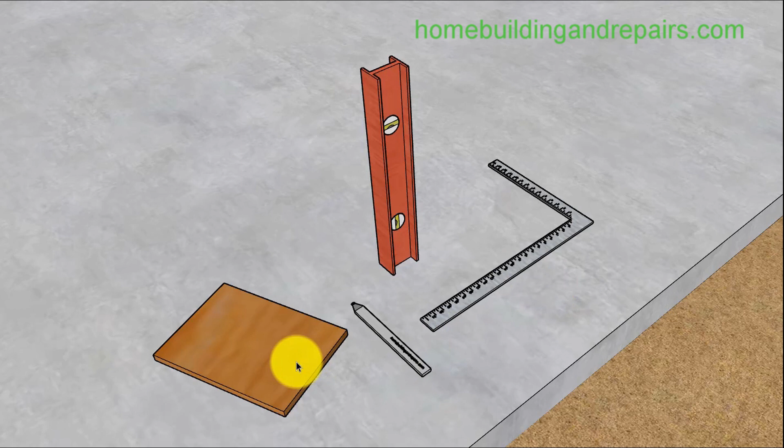In this video, I am going to provide you with a method that can be used to figure the roof pitch or angle of a roof, the slope of a roof, with a level, a framing square, a pencil, and a scrap piece of plywood.

This will work even if you have shingles on the roof, with a long enough board. Even if you had tile shingles, you could position the board in a certain spot to get the angle and do the same thing. So you can give it a shot, and you don't need to climb up on the roof to do this. I'm at the edge of the roof here. Get a ladder, and on a two-story house this would be a little harder to do, even harder on a three-story home.

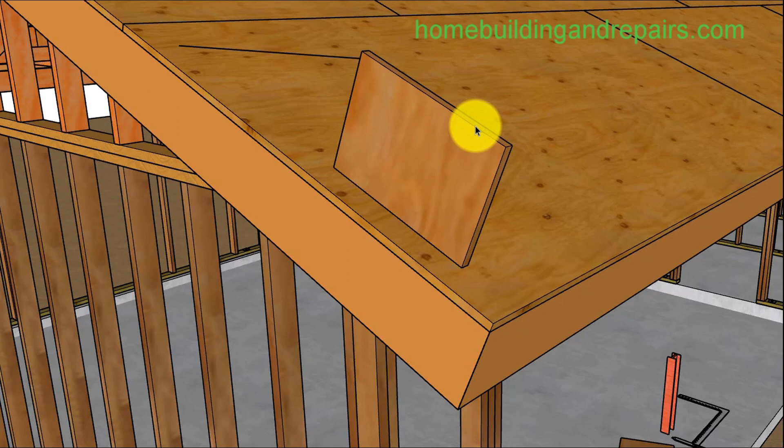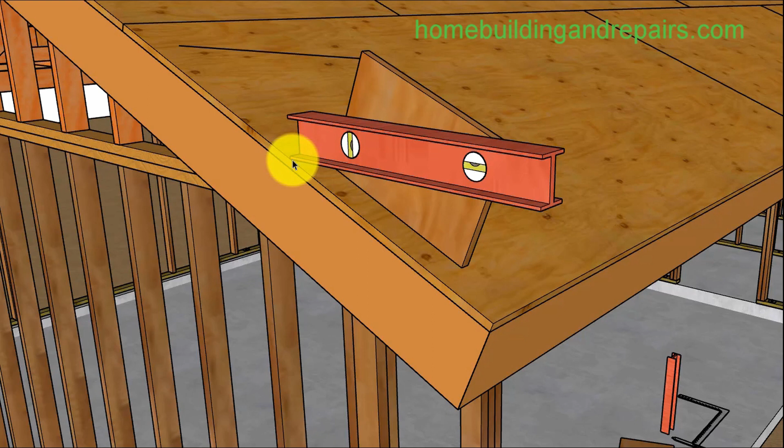So first, put your scrap piece of wood on top of the roof. You're going to need something at least 12 to 15 inches long and about 10 inches tall. Then put the level up on the roof. It will rest on the edge of the roof sheathing or shingles, and then level it. You can see it here.

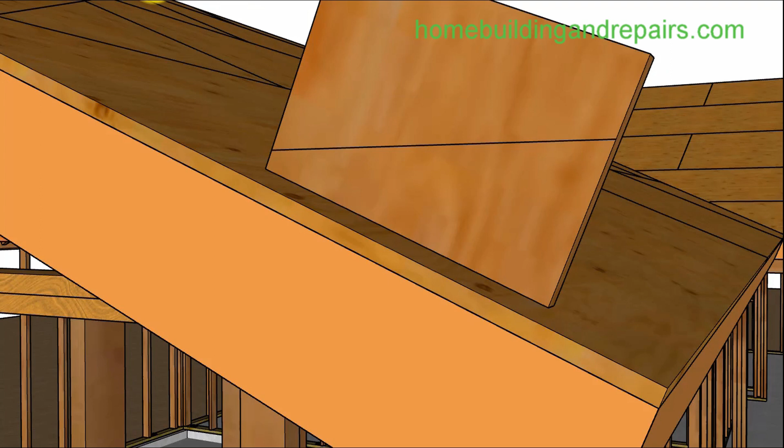The board doesn't need to be positioned exactly over this point. Just get yourself a straight line across the piece of plywood and mark it. If you're looking for a more accurate reading, because a small piece of wood could be on a hump or a warp, something like a bow, or a curved surface, this isn't going to give you a good reading. A longer board might give you a better reading.

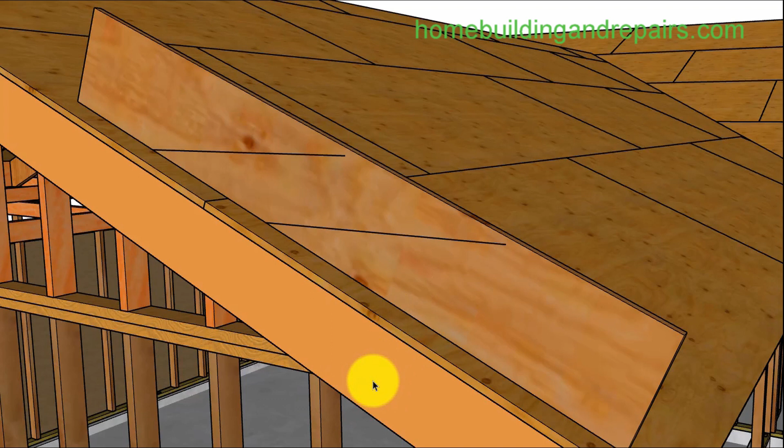You might need to take the longer board and put it in a different area of the house. The same method could be used on the fascia board, but sometimes the fascia board is bowing or warped too, creating the same problem. So this isn't going to give you a perfect roof pitch number all the time, but most of the time it's going to get you close enough to do some repair work if you need to.

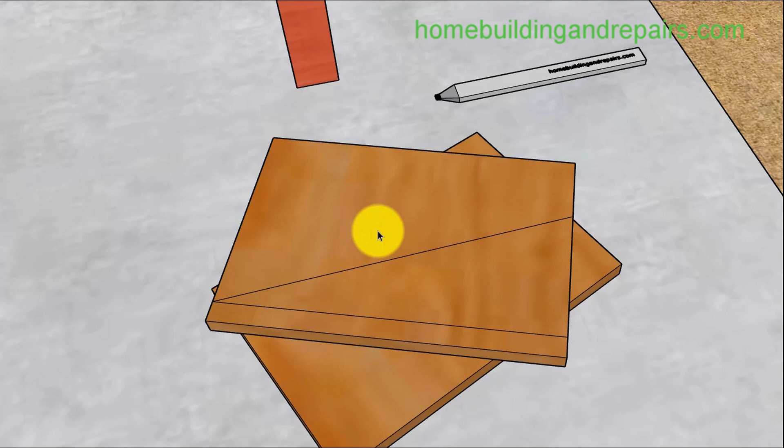Next, take the piece of plywood down and put it on a flat surface. Draw a line parallel to the roof surface. Remember, this was the surface of the roof sheathing, this was the line we made with our level. We want it to come off of this point so we can use it for our framing square.

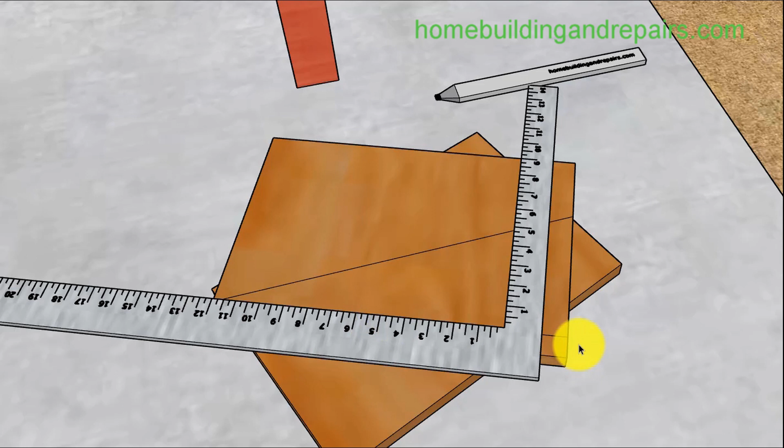The framing square will line up the number 12 on the framing square with that point, and it will be parallel to the line we put on there to create the point that's parallel to the roof sheathing. So here's the 12, here's the 5. This gives us our pitch. We would have a 5 in 12 roof rafter, or 5 in 12 angle, on our roof.

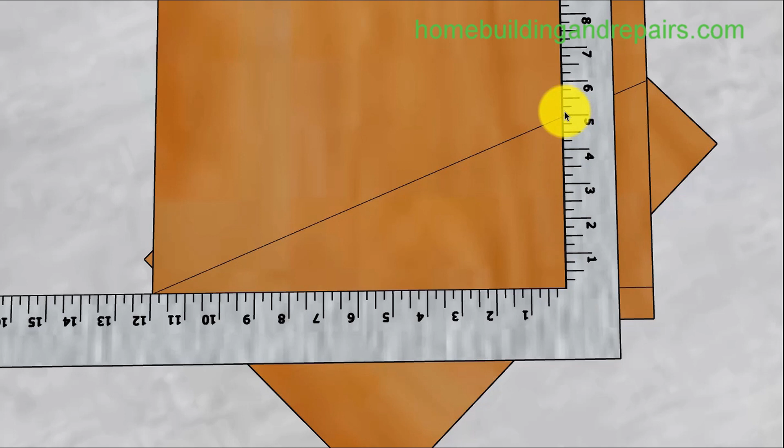This would represent the vertical, or up and down, cut, and this would represent the horizontal cut on the rafter. This would be more or less the top of the roof at the ridge, and this would be the angle here that sits on top of the walls.

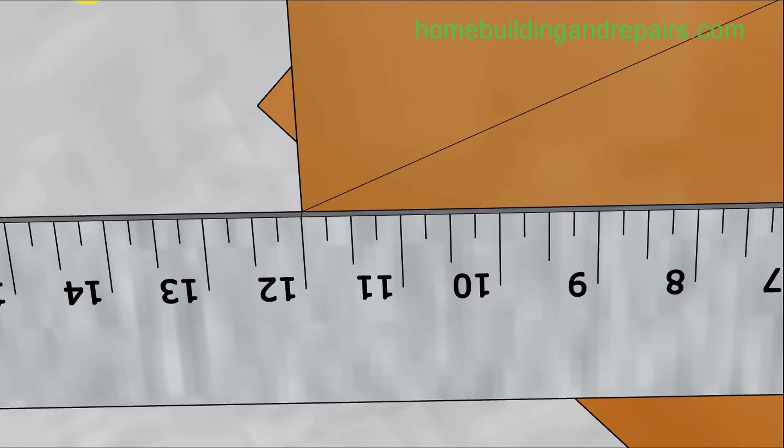Let me zoom in to give you a better idea of what we're talking about, how we're lining the 12 up with the point there, and the line lines up with the number 5 here.

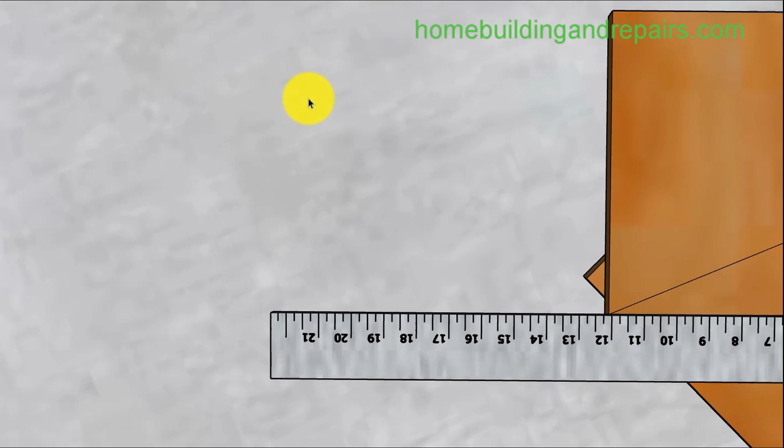Now, in a perfect situation, this is going to happen, but I hate to say it, this is probably more what is going to happen. You're going to run into a situation where you line everything up and it's a little bit away from the number you're looking for.

This could happen because there's a little bulge in the roof where you put your piece of plywood. If you do come to a situation like this, you might need to go with a longer board if you need a precise measurement or angle, something like that.

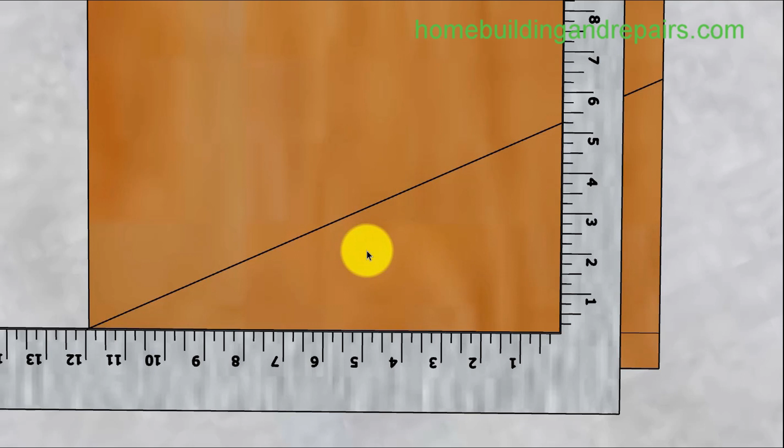But you can assume that either this was a 5 and 12 and the person who installed the roof did it correctly at the 5 and 12, or you can use this measurement for your angle, but it's not going to be that far off. These measurements are normally used for doing roof repairs, and if you're doing a repair, 5 and 12, or 5 and a quarter, even 4 and 3/4, is going to provide you with something that might be just close enough.

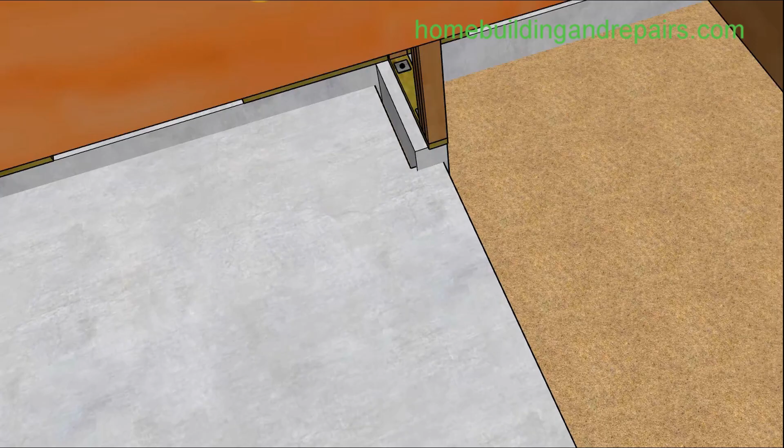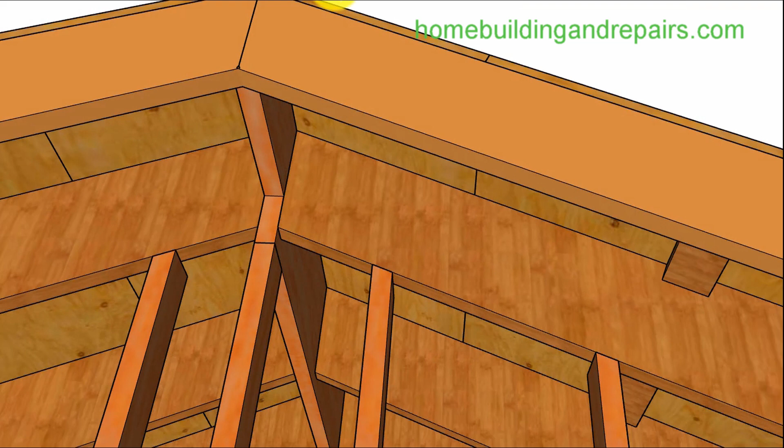Again, this is something that could be used for figuring out repairs if you have some badly damaged wood where you just can't trace the measurement from, or you might have some wood that is warped, twisted, or deformed, with a big sag in it, which could create a problem for getting a measurement too.